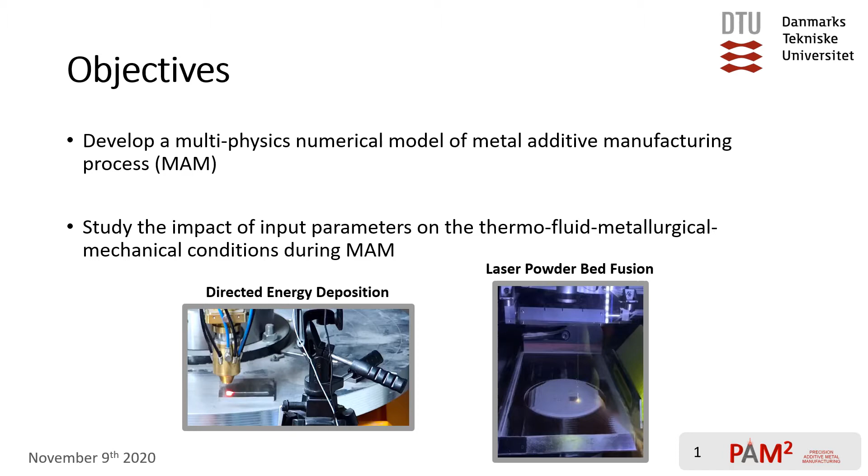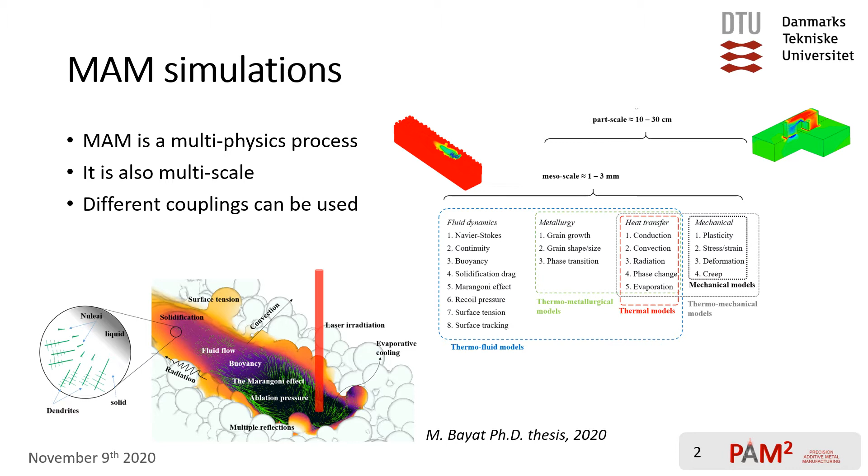Now let's go back to the MAM simulations. MAM is not only a multi-physics process, but also a multi-scale process, which means that we will need different coupling strategies to model the different physical phenomena that occur during the process. For example, according to the figure on the right side, we can have a thermal model or a pure mechanical model, or a combination of these two, a thermomechanical model. You can also see the two domain sizes where we can have a mesoscale model and also a part-scale model, depending on the purpose of the model.

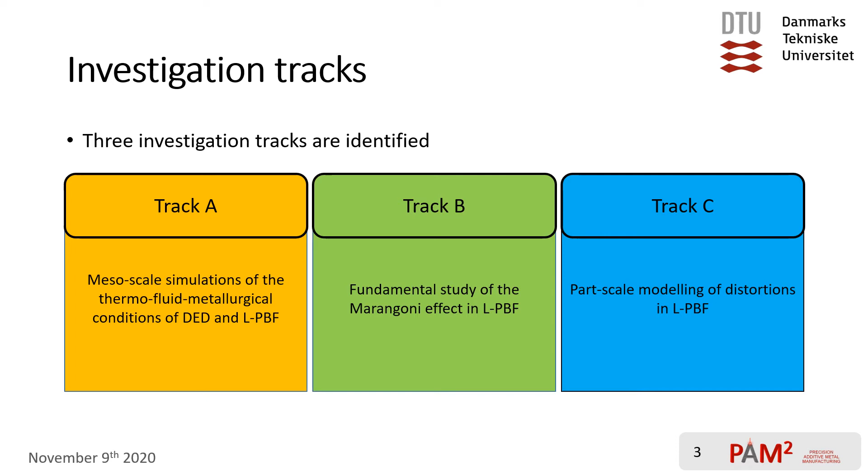So during my PhD, I divided my research into 3 investigation tracks, where in the first investigation track, I mostly focused on mesoscale simulations of DED and LPBF. In the second investigation track, I studied the Marangoni effect in LPBF. And in the final investigation track, I did the part-scale modeling of distortions in LPBF.

For example, in one of the studies belonging to the first investigation track, I developed a FEM-based thermo-fluid model of the LPBF process of Ti-6Al-4V, where I developed a conico-Gaussian volumetric heat source for modeling the laser material interaction. And then finally, I studied the impact of beam size and also the scanning speed on the melt pool morphology, cooling rate, and the dendritic growth directions.

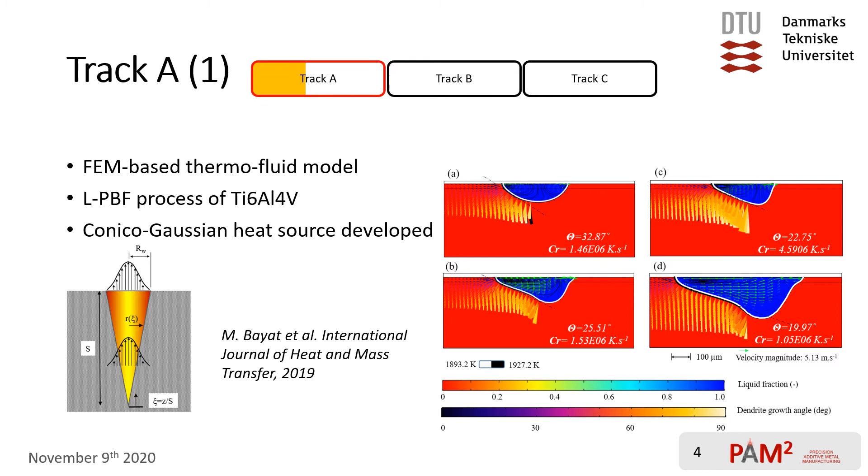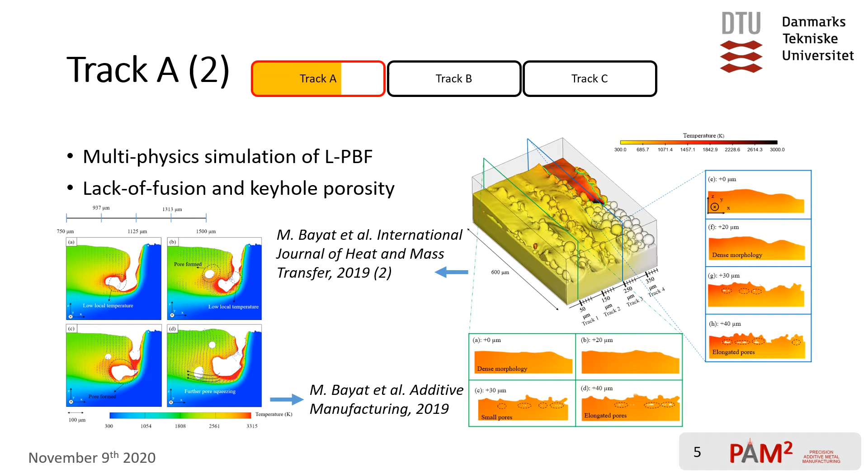In two other research works from the first investigation track, I developed multi-physics simulations of the LPBF process, where I managed to predict the formation and evolution of lack of fusion and keyhole porosity during the process. Then I compared the predictions of the model with the experimental data that I got from our partners from the PAM² project.

And in the final part of the first investigation track, I developed a multi-physics simulation of the DED process of maraging steel, where I compared my numerical predictions with online and also in situ measurements using a thermal camera. We also found that by using higher carrier flow speeds, we will have a weaker bonding between the track and the base plate.

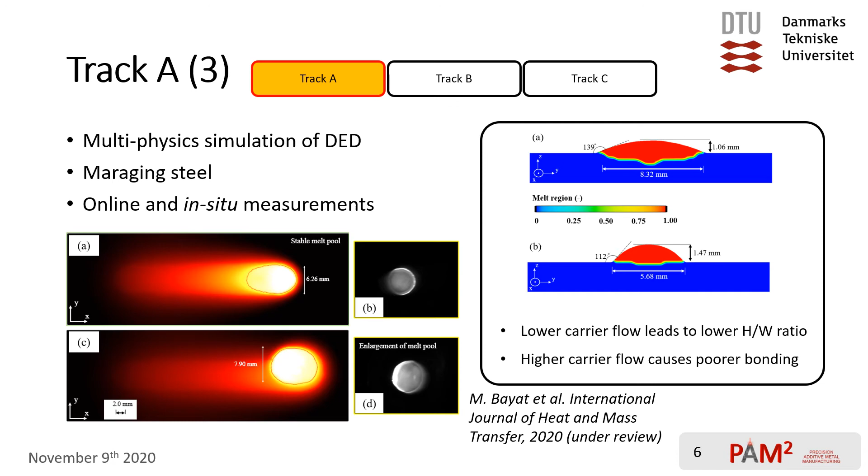In the second investigation track, as I noted earlier, I studied the impact of thermocapillarity or the Marangoni effect on the melt pool conditions. We found that by using higher Marangoni numbers, we will have lower melt pool temperatures. That in turn will reduce the significance of conduction inside the melt pool as we destroy the temperature gradients during the process. This work is currently under review in the International Journal of Heat and Mass Transfer and hopefully will soon be published.

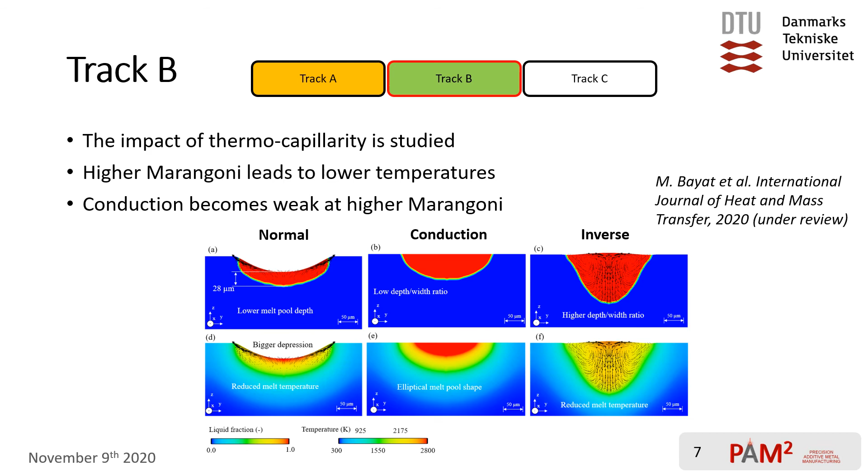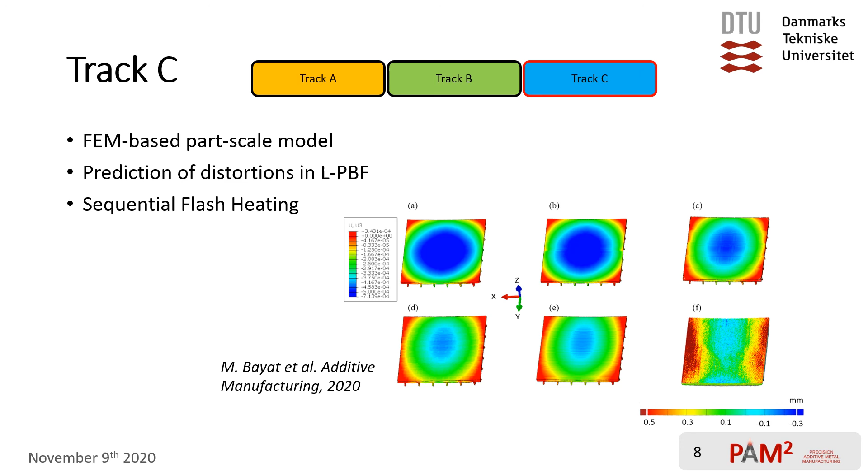And in the final investigation track, I developed a part-scale and FEM-based thermomechanical model for the prediction of distortions in LPBF, where I used the sequential flash heating technique, and we found that if we use a sufficiently fine stripe size in the sequential flash heating technique, we can have a very good agreement between the numerical predictions of distortions and the distortions found by experimental methods.